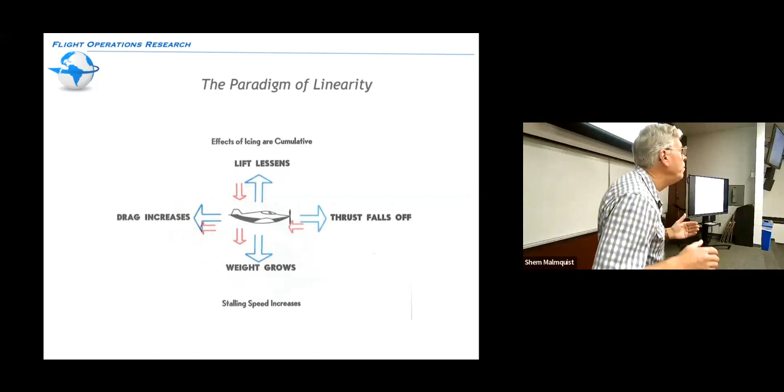Now, that brings us to a really, really key concept, important for everyone to understand: what I refer to as the paradigm of linear degradation.

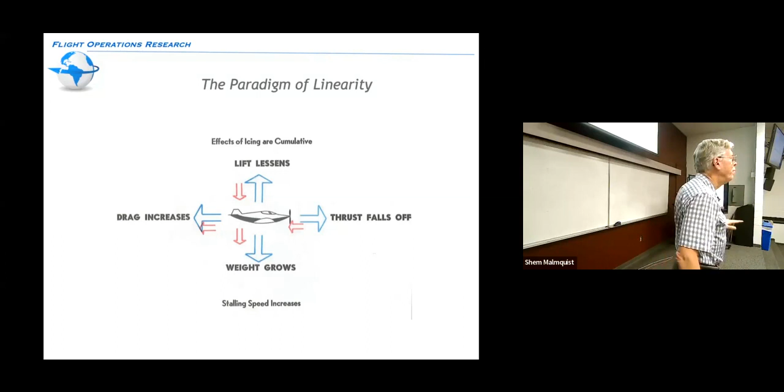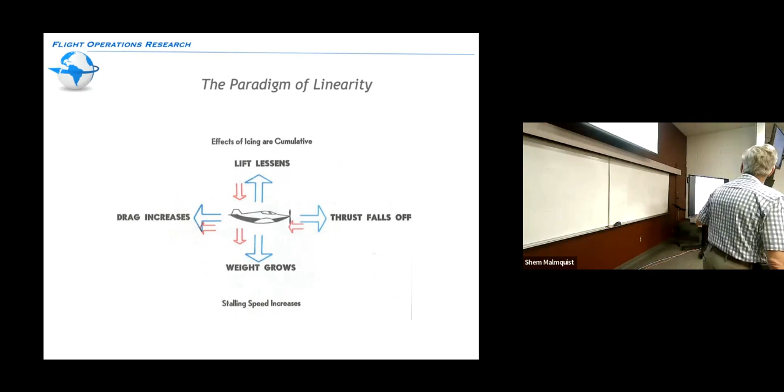So for many years, in the Aeronautical Information Manual, the FAA published this diagram. It's a classic four forces diagram, lift, drag, thrust, and weight. It talks about the idea that the effects of icing are cumulative, that drag is increasing, thrust is falling off, and lift lessens while weight... well, we need to think about that a little bit.

Does the weight really grow?

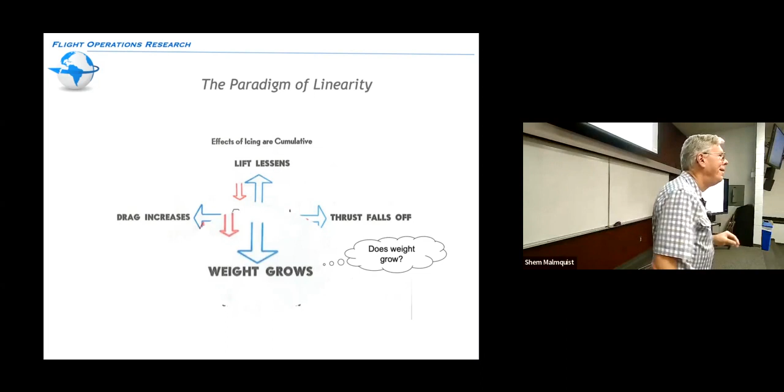Well, but by how much? Over time, the weight's the issue for the airplane. Not here, but if you're in an airship, that's different. If you work out the weight of the ice, the typical case, it'll never weigh more than the fuel you burn while you accumulate it. So in terms of it being a real issue...

So what is this all about? What are we trying to do? Well, if we look at this whole paradigm, what they're doing is building this kind of model.

That's not how it works. It's really, really important to get that idea out of it. And it's tough, because a lot of stuff needs to be kind of straightened out.

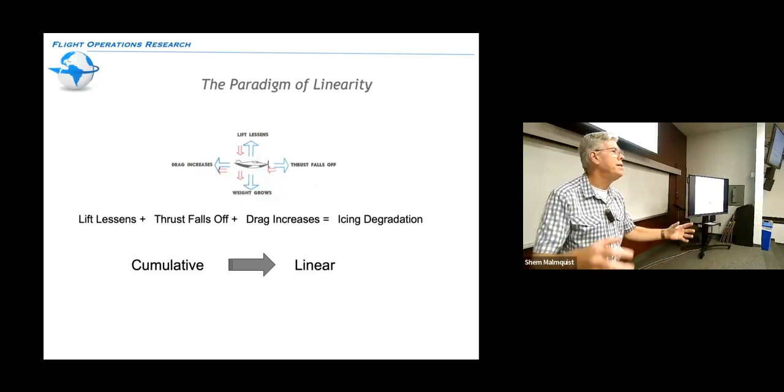Cumulative implies linear, though they don't necessarily mean it that way. They're sort of suggesting that all of these things can add up to your level of safety. And I get that idea, but the word very strongly suggests it's a linear problem. It is not a linear problem at all. And that's where we get into some real trouble.

And that's where it is. So, just to remind you, cumulative is leading down this linear path.

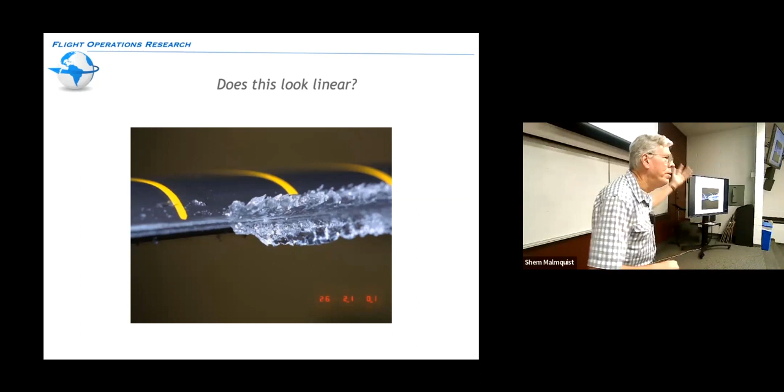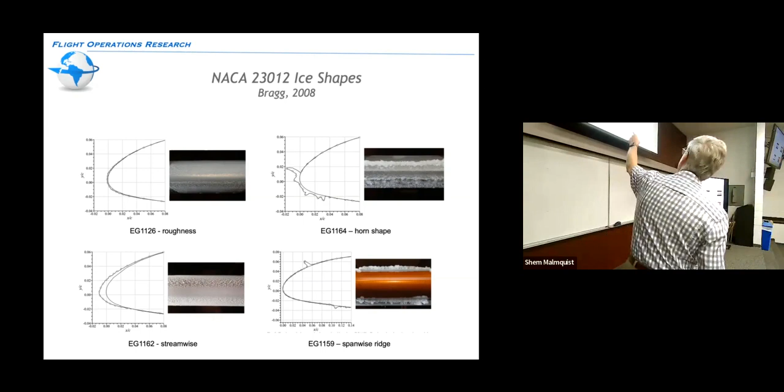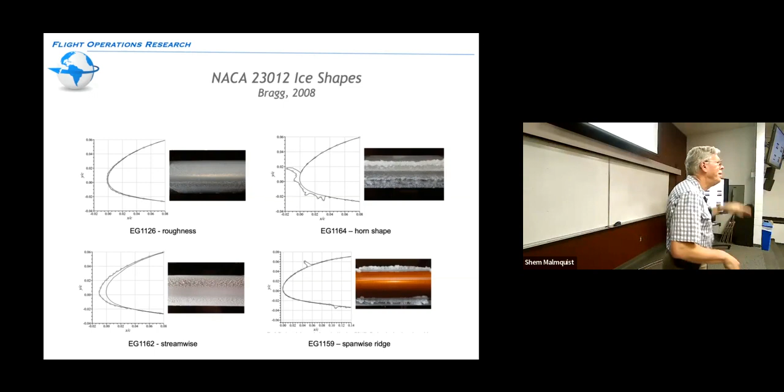Smooth stuff, yeah, it's a little bit misleading. So let's take a look at what the effects for these same ice shapes actually are.

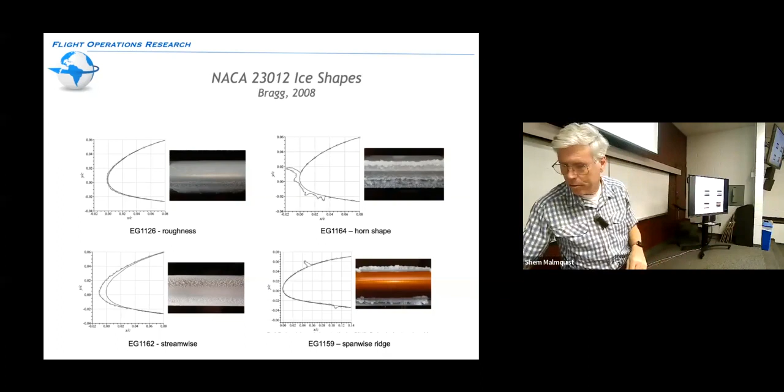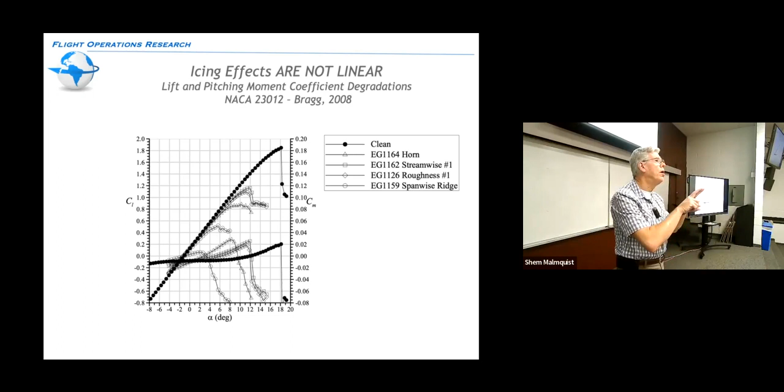The question is, are you going to realize that you are moving this? Notice all the spots kind of overlap each other. So the behavior of the wing is probably not going to be that critical or appear to be that different at that point.

Look in that area — are you going to notice any change there? Probably not, the plane seems to be doing okay. Increase the angle just a little bit more than in this picture. Cool.

So the idea you might get is that it's a linear progression and the icing effects get bigger and bigger, so you'd feel more and more of the degradation. But you're not going to feel it — it's going to be quite sudden, it's not going to be this sudden clear warning.

So that's point one: be careful of how the lift curve is affected. Be careful of assuming you're going to have a clear warning from the loss of lift — the loss of lift is probably not going to be obvious.

Next thing to look at is the pitching. If we look down here, the black line is flat, fairly flat — that's what we want, the pitching moment is steady. Notice all the ice shapes cause changes in the pitching line. Even much earlier in the stall, up here, we're starting to see departures in the pitching line, which can be fairly significant.

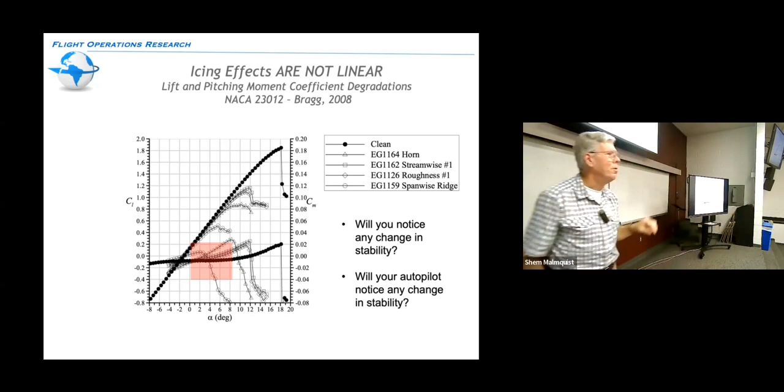Does that make sense to everybody? Keep that in the back of your mind. Now let's take a look at the drag.

You're going to see significant degradation early. Most people with experience in the left seat aren't having any problem with drag recognition, but the drag problem may be sufficient that they're out of power, not having enough excess power to maintain the speed. So one of two things is going to happen: we're slowing down, or going down.

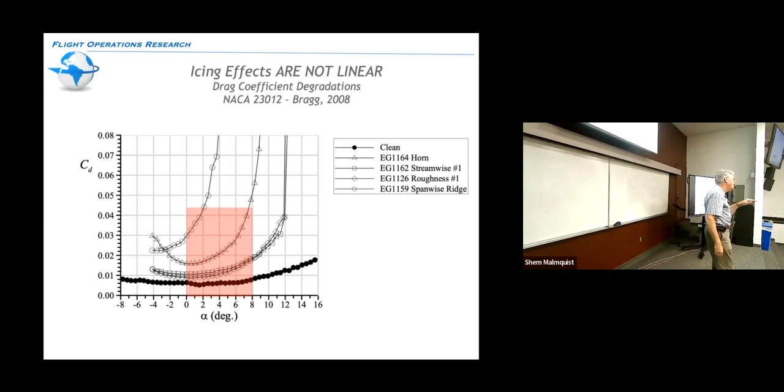Typically in light aircraft, general aviation aircraft, particularly people with slightly high performance airplanes operating near their service ceiling because they're trying to cross mountains, they get into real trouble. They can't make it out. So what happens? They descend, or they try not to descend, and then the airspeed goes, and we get back to the previous slide of stall and loss of control.

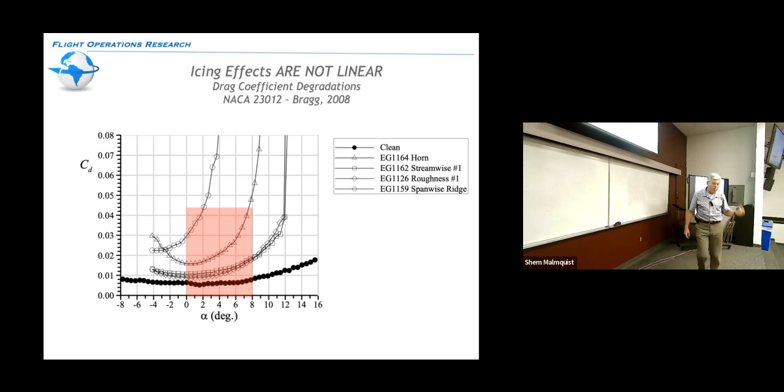So the drag is probably going to show up earlier than the other effects. Once you start getting into the drag problem, you can look at this slide and say to yourself, I'm feeling this kind of drag, I'm really getting a lot of drag. Just go back to the previous picture in your mind. It's probably pretty close. We need to manage this. We'll talk about that at the end, just how we're going to manage this.

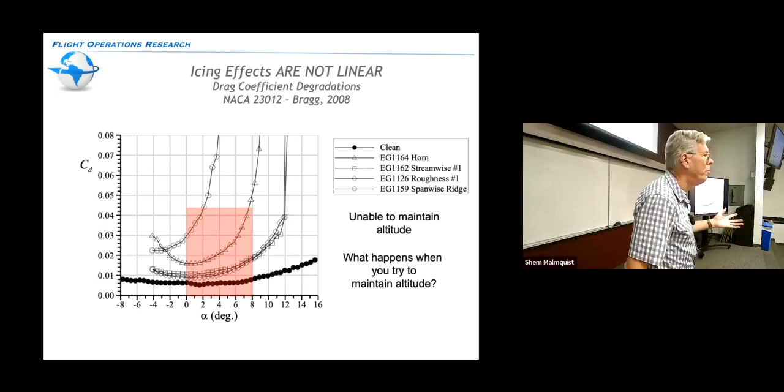Okay, let's talk about another piece. It's a little bit of a shock. What is known as the roughness factor, usually the k over c. Basically this is the height, thickness of the ice, ratio to the chord length.

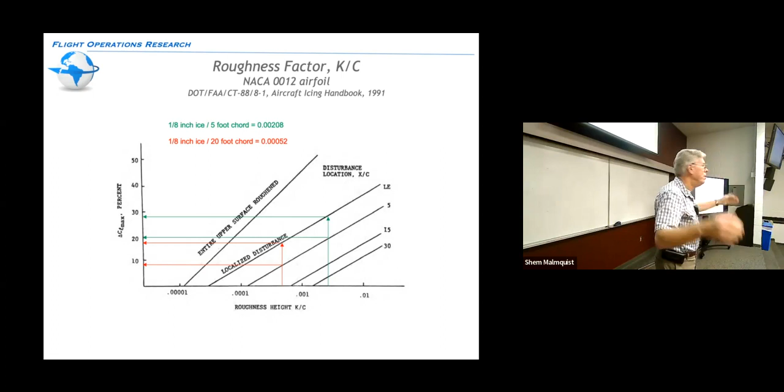So what you can see here is, look at the red arrow - we're looking at an eighth of an inch of ice on a 20-foot chord. Green arrow, eighth of an inch ice on a 5-foot chord. So with the 5-foot chord, we look at the ratio and it gives us the roughness. Here we come up, we put the ice on the leading edge, we get a 28% degradation in the coefficient of lift. If we put it 5% forward, halfway back on the ice piece, we have 5% of the leading chord, 5% back, you're going to get a 22% degradation or so.

Now this is representative of one airfoil, not the same for all. The idea is you can see the kind of degradation you get depending on where we put the ice shape and the thickness. You take the same ice shape, put it in the same place on a 20-foot chord, and you can see the degradations are much lower.

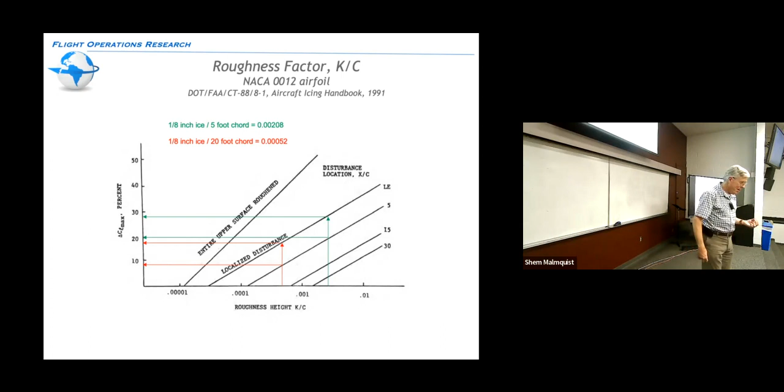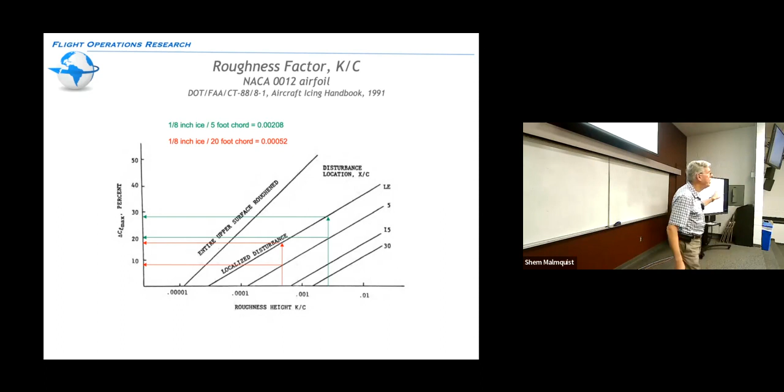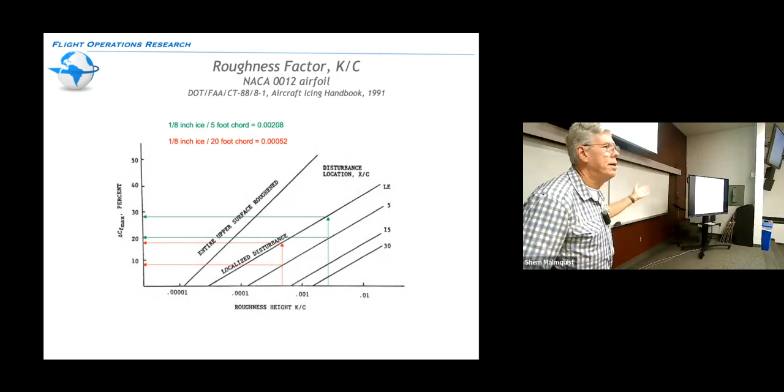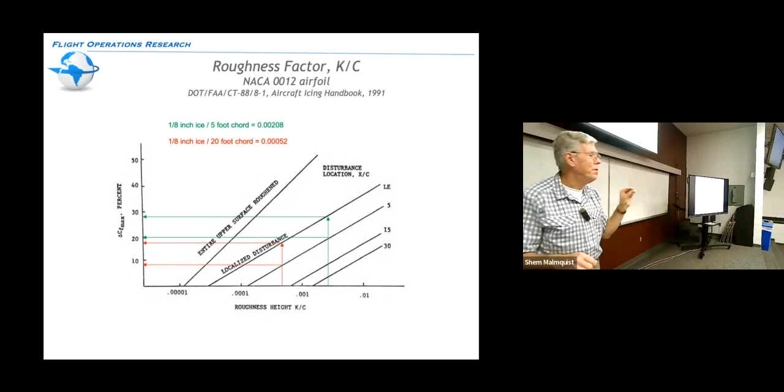Does that idea make sense? You can get the idea of the ratio between thickness and chord. You're on a 747, you put on an eighth-inch of ice, you probably won't notice. You put that same ice on your small plane, you'll notice it much more - so it's not just the thickness of ice, it's the relationship with the chord. So what does that lead to?

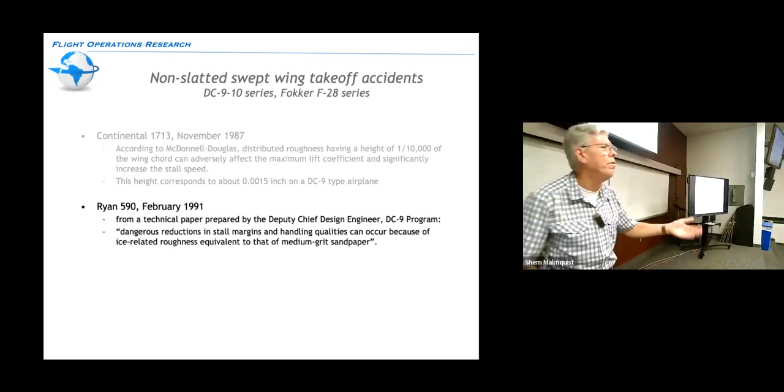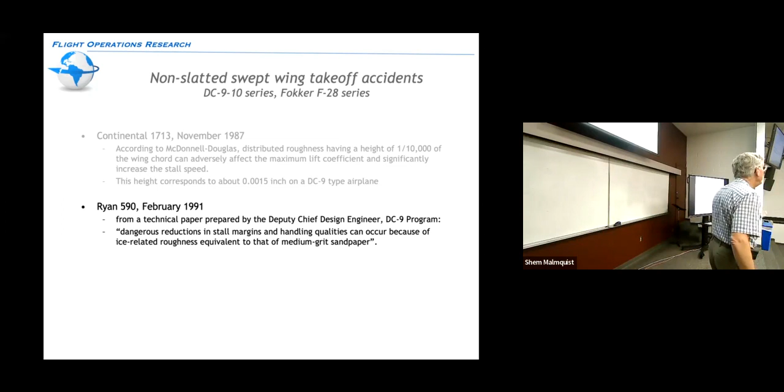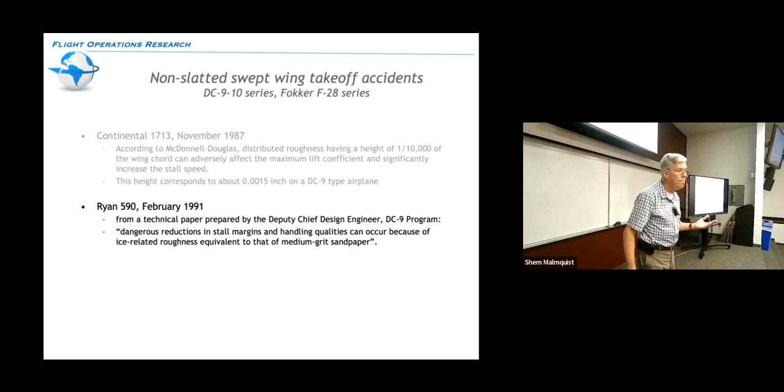On the other hand, in flight, be a little bit careful when people tell you that big airplanes don't have icing costs. Because the ASRS report - that's the database - shows a 757 approaching Chicago.

What the crew said was at 200 feet, the airplane pitched forward severely. Go-around throttle applied, 50-foot call occurred in the middle of the approach lights, maximum throttle applied, and just barely cleared. Then they said on arrival at the gate, we found the entire aircraft was covered with clear ice, 1 to 2 inches. So most of the time we don't have a problem.

I've never had a problem with this. Don't get too complacent just because you're in a big airplane.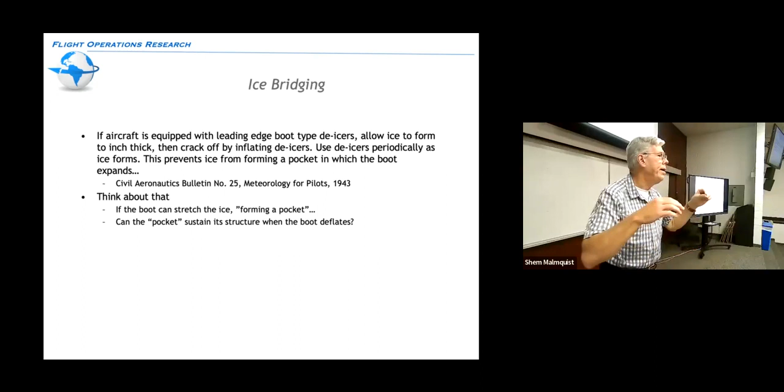The other possibility is that what we're seeing is residual ice left over. The important thing to understand here is how many cycles of the boots it takes to clear the ice - not just one. That's the problem.

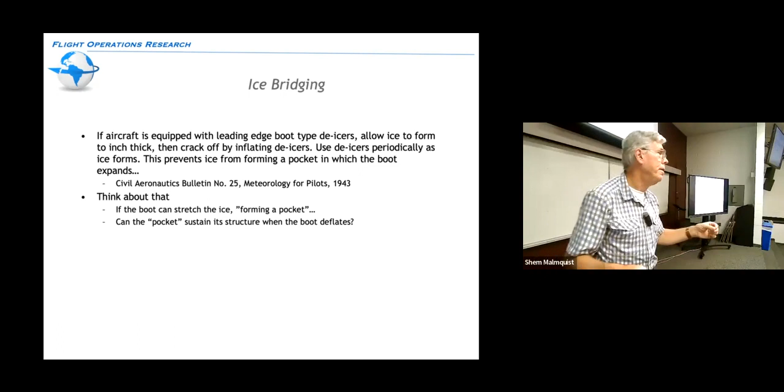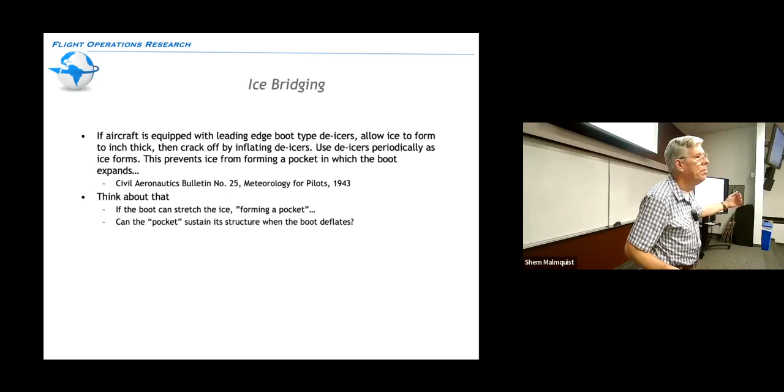People will cycle the boots and say, I got a little bit of boot cycling, look out and say, oh, I need to de-ice. So the feeling is it must not be working. Well, it turns out it takes a little more than just that.

I do want to point out that in the icing database, looking back to 1980, there are literally zero accidents.

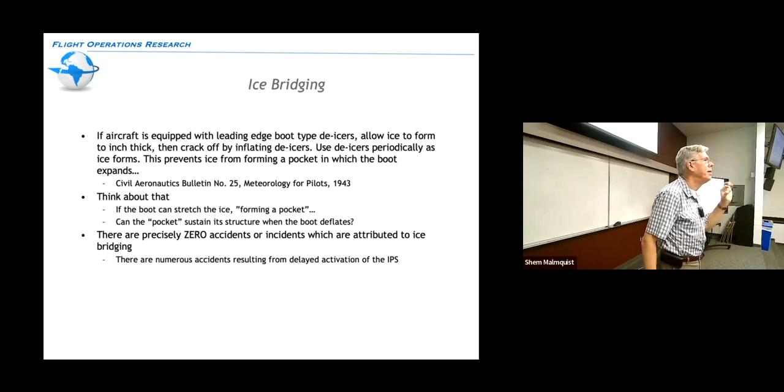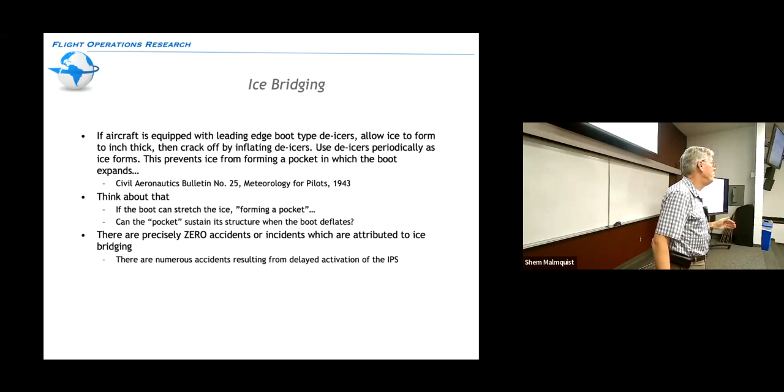There are, however, plenty of accidents resulting in the delay of activation. People say, I didn't want to put it through. I was afraid of it. We didn't charge it. I don't think it's...

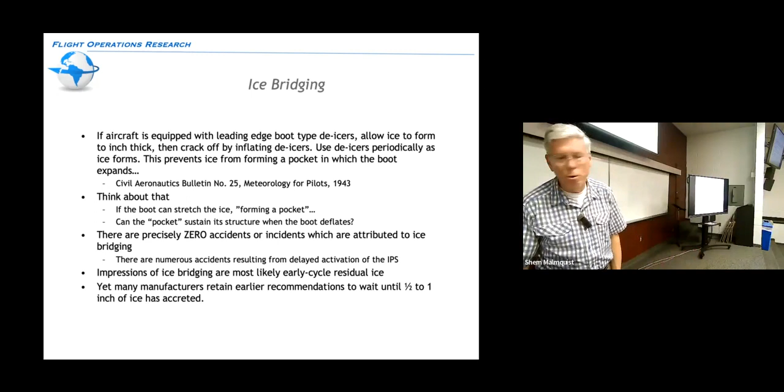As I said, most likely the early cycle residual ice. Let me just explain what that means. I should point out that manufacturers still recommend to wait until half to one inch.

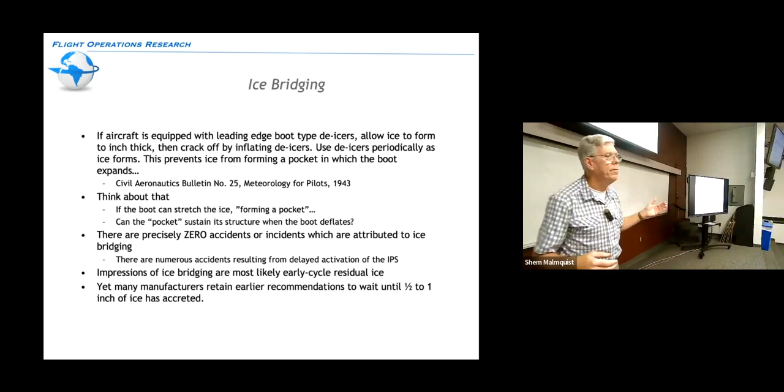There are a lot of reasons for that. That's where you get certificated. They don't want to change that because they haven't done the new certification work on it, et cetera. So comply with the manufacturer's recommendations. In some cases the grade quality is different, be aware of this component. Now, it turns out the guy did a whole bunch of these back in '56.

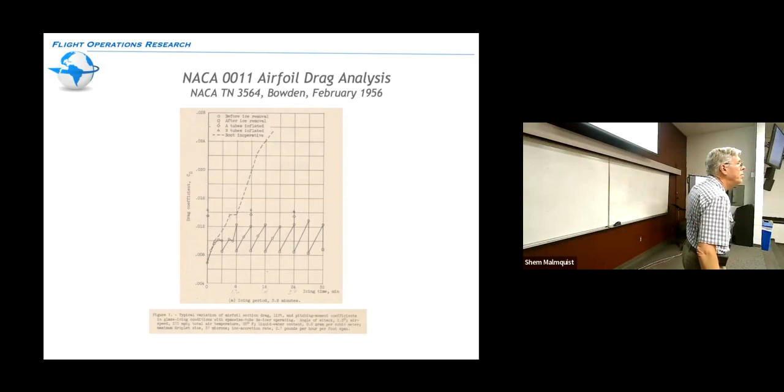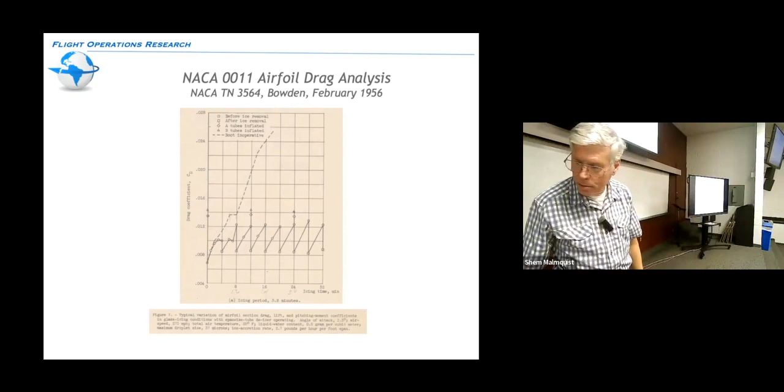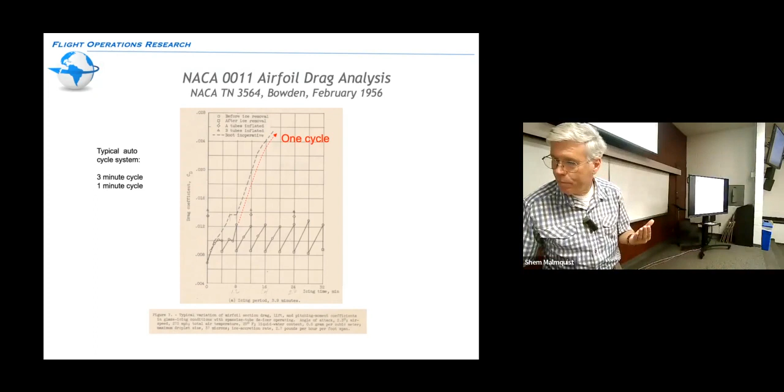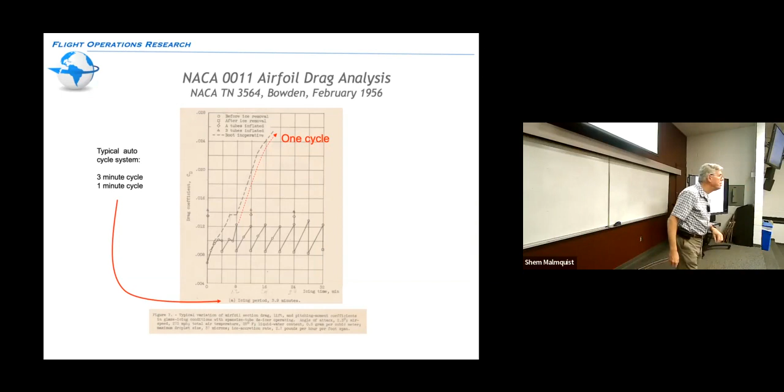Now, on the other hand, if you look at an automatic system, like most of your large props and so forth, you're going to have a timer, typically three minutes, sometimes as fast as one minute. You can set that timer and just run it. Notice the icing period used here is 3.9 minutes -- look at the sawtooth pattern down here. That's what he's getting by cycling the boots every 3.9 minutes.

Okay, let me tell you a little story. Back in the '80s, we had an auto-cycle system, and we all knew it was pretty good stuff, so we went with that. We were always watching the windows and pointing out ice breaking off.

One night, I don't remember where I was coming from, west of Richmond, and really getting this weather, and we were busy as hell. I just did not have time. I said, all right, screw it, we got distracted by all the other stuff going on. Ten, twelve minutes later, I thought, geez, looked out, cleaned this off -- ooh, it's working beautiful, you know. And that's what we really got to do.

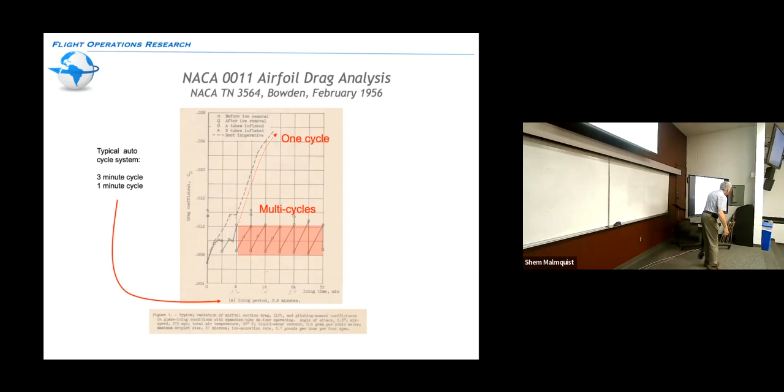But the point is, the first couple cycles are not quite as routine, because it takes two or three or four cycles to actually get cleaned off and develop a consistent pattern of what we call intercycle, which is what builds into cycle, and residual -- what's left after. We want to do these cycles properly, we've always been stuck on this, and we want a consistent pattern. That's what the boot is designed to do.

One other thing I'll add is most pneumatic boots are a material that has to be maintained. If you don't take care of your boots, they're not going to perform. They have to be lubricated or have talc or those other compounds that are used. You have to maintain the boots -- whatever you want here, and if you do it, you really stop the problem. So to get this good cyclic pattern of the boots, you need maintenance.

Okay, so by the way, I noticed this particular research is 2.7 pounds per hour per foot span, just to give you a sense.

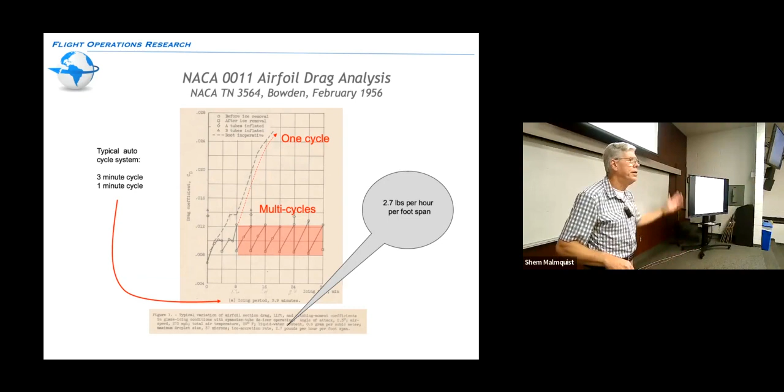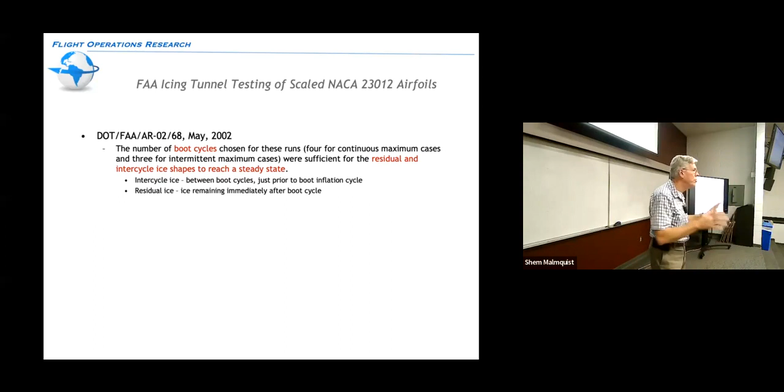If you want to, go ahead and cycle the boots, run through the cycle -- don't necessarily worry about checking to see if it's working right away. Just keep cycling the boots going.

They did a bunch of other testing. They mentioned that the boots were just as effective when activated 11 seconds from the start as they were if you waited longer. So that's another feature -- just getting started, don't worry about waiting. Which again goes back to complying with the manufacturer's recommendations.

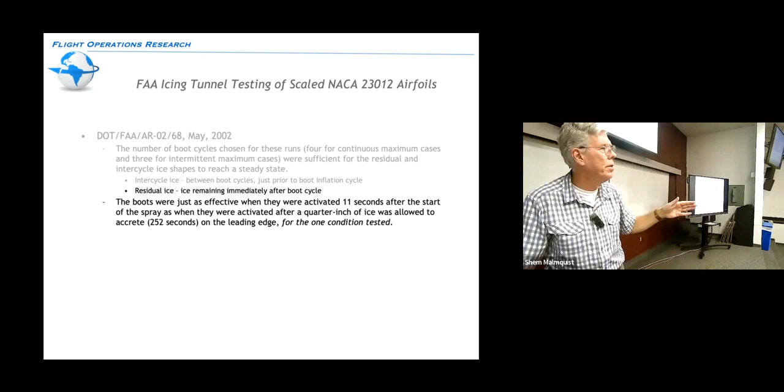That's kind of what the rest of it showed. In '06 they did the same thing, and they had pretty much the same results. So the key point is just the multi-cycle.

Let me show you the effect on the ice accident data. If you don't operate the de-ice, you get that result, because if you don't use it, you don't have protection — you can't trade that. If you operate the ice protection at less than four cycles, you still get slight icing.

I was able to figure this out by reading lots of pilot reports and statements. These are the things we do, but all the data doesn't tell us exactly how we do it. So basically what it comes down to is at less than four cycles, you still have lots of problems. At unknown cycles it's a little less — we really don't know how many cycles. Guys who operated manually more than four times had better performance than we do now, and that's really all I'm trying to get at.

When we have the auto-operated product, you have to do this at a smaller size. The point is, multiple operations won't get rid of the other issue, and eventually we get to a steady state. That doesn't mean don't pay attention to it — it's not that it's not working, but just because cycling over time doesn't mean it may not be working. Check it, but it's a multi-cycle issue for us.

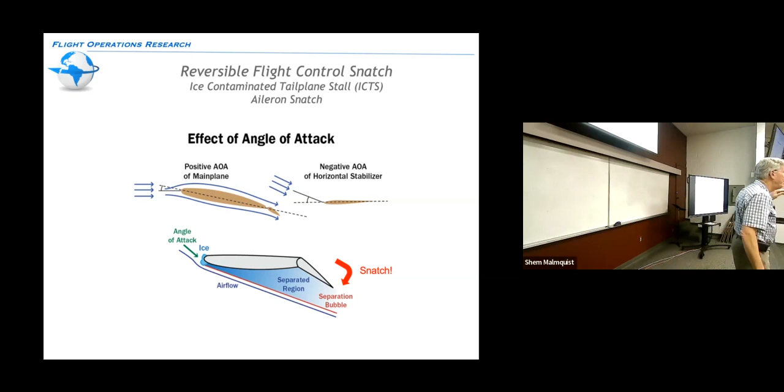So the control literally snaps and moves to full deflection without any input from you. It still works — we get the airflow lower effect with the pushing effect, but you don't have control. That's what happened over Roselawn, coming out of the holding pattern — it was pretty slight, and the close separation over the top of the aileron disrupted the others.

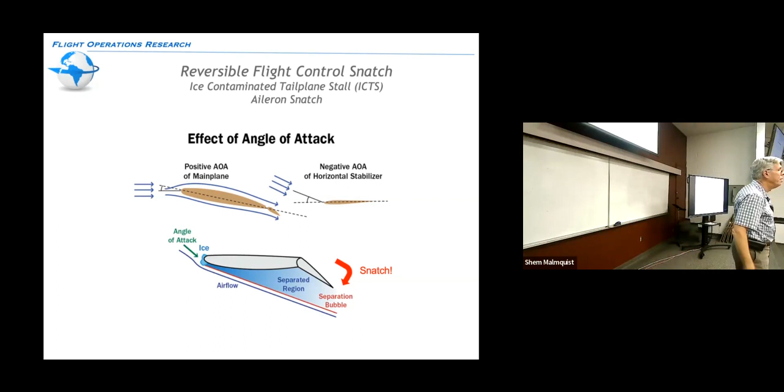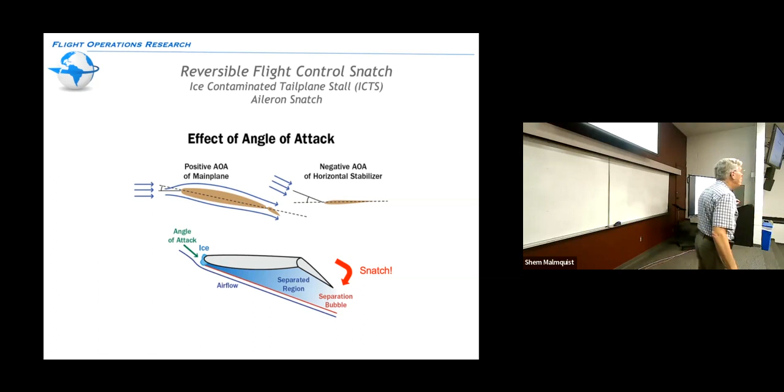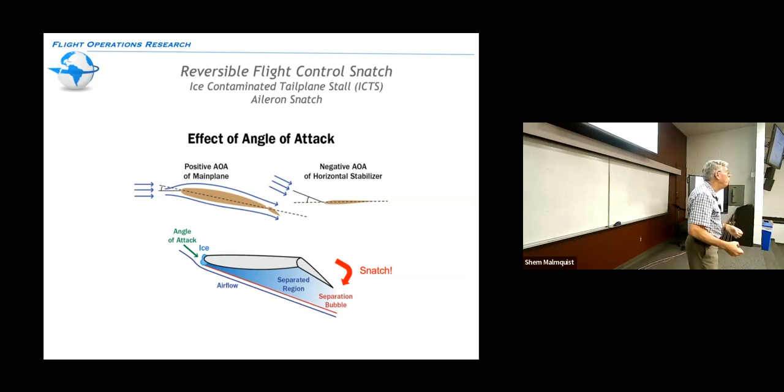A couple other things can happen before that. One of the things that can happen is you can have a change in the stick force gradient. This is a really nasty feature that might be associated with the tailplane stuff.

Just to give you a general sense of what's going on here — we want it to be stable. We want the stick force gradient to increase as you pull or push the stick; we want more force with more pull and push. What happens if that gradient doesn't change? You pull the nose back and it feels the same as it did when it started — there's no stick force change at all. How does that affect your workload and your stability? I think you can get an intuitive sense of it.

Here's the thought — what happens in typical ICTS events: you're on approach, coming down a 3-degree glide path, you get a little high, you push the nose down, the elevator goes down, that enhances the flow separation. You get below the glide slope because you got much more deflection than expected, so you pull back, but the stick gradient has changed. You get low on glide slope, so they pull the nose back up, and now they get lots of deflection, much more than they expected. They go way above the glide slope, and thinking 'oh my God, we're in trouble,' they shove the yoke forward — and that's all it takes.

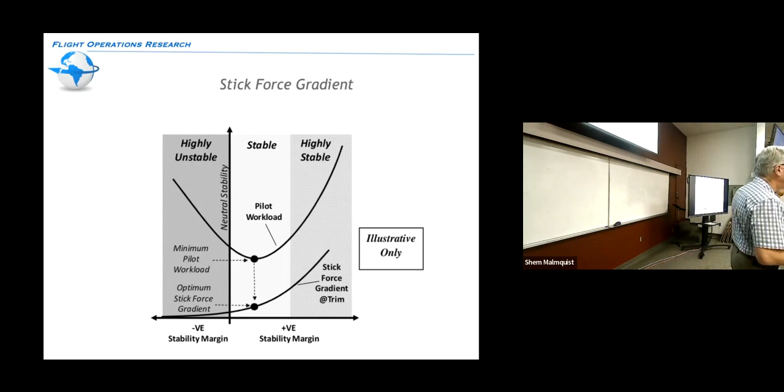It's a little bit unnerving to think about. So anyway, stick force gradient.

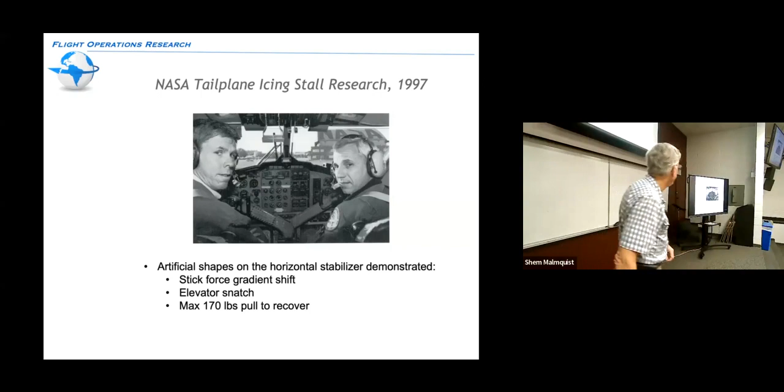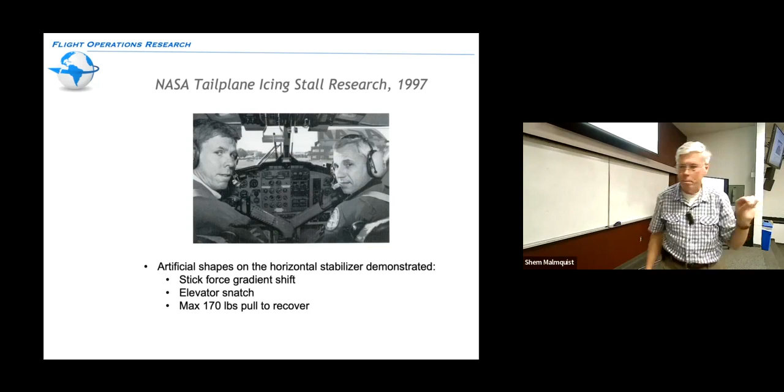Last one I want to go through is drag. This is a big one. You're going to run into this before you expect it, and nobody talks about it. It's amazing. So back to Dean Bowden's work with the drag curve.

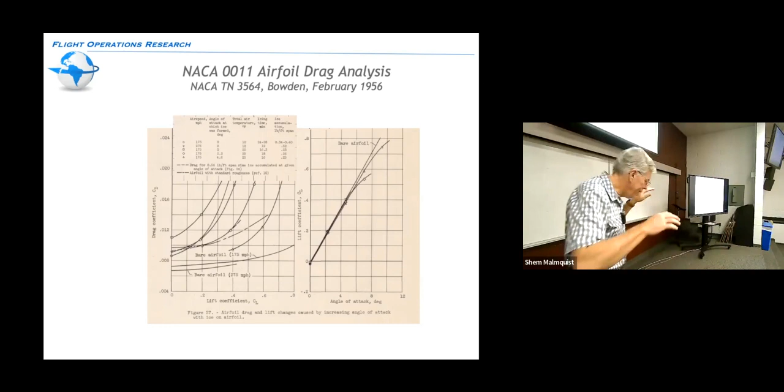What he's going to do is say, alright, let's start at a 2.3 degree angle of attack, because that's what spring ice gives. If we look over here at the 2.3 degree angle of attack, we'll often get a lift coefficient of about 0.2.

Now we use that 0.2 and go over to this drag curve. We've got a bunch of curves, and I'll try to walk you through this to see what's going on. It's kind of cool, particularly since he was doing this in 1956, nobody thought it made sense. You come right up here, you get a bare airfoil coefficient of drag of about 0.0075. We're going to see that in the spreadsheet.

That's the bare airfoil. Now, let's take the iced airfoil at 2.3 degree angle of attack. Come up the same way, move it up, and we get a drag coefficient of about 0.01. So there's a delta, a change. You get more drag with the ice at 2.3 degrees angle of attack. The boxes indicate the change in drag from clean to ice.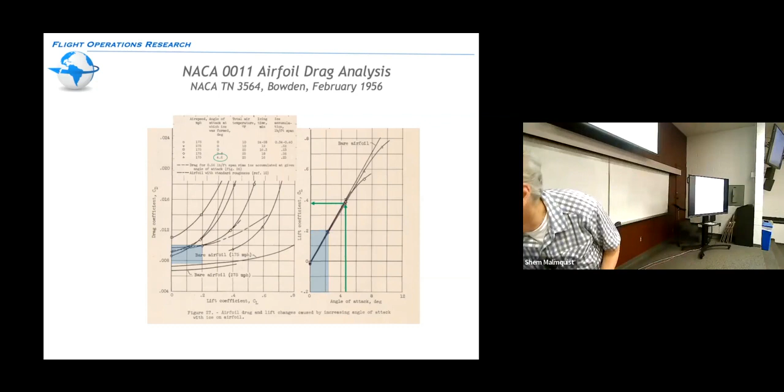Now we'll look at the ice if we accrete it at 4.6 degrees, double the angle of attack. Now we have a different lift coefficient, the green arrow, at about 0.38, and we enter at the bottom at 0.38, go up to the clean airfoil. Right there we get a drag coefficient on the clean airfoil of 0.008. So we accrete at this higher angle of attack, and we're going to get a drag coefficient.

Now we'll move up to the iced airfoil at 4.6 degrees, and we get a drag coefficient of 0.0092. So you can see there's actually less of a change at 4.6 degrees than there was at 2.3 degrees. Okay, that's cool, I think everybody wants this. Here's the cool part.

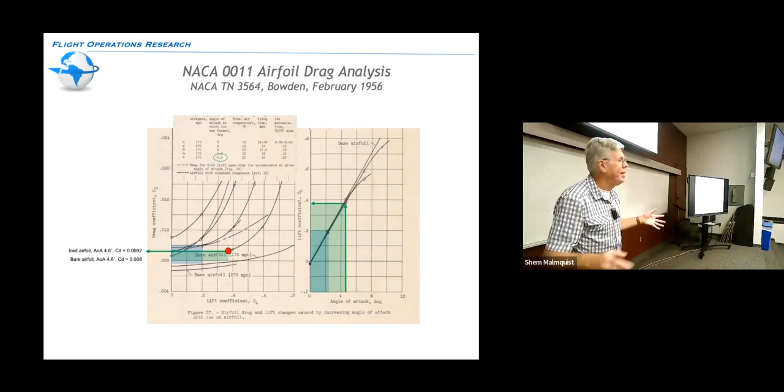Let's go back to 2.3 degrees. So here we are, angle of attack 2.3 degrees, just to do the question of what we just did. We come up here, that's our bare airfoil drag. There's the iced drag from accreting the ice at 2.3 degrees. Now let's increase the angle of attack to 4.6, with that ice we picked up at 2.3 degrees. Follow the red ball up the curve and across there, and we get a drag coefficient that's much worse than we would have if we'd accreted it at 4.6. Does that kind of make sense to everybody?

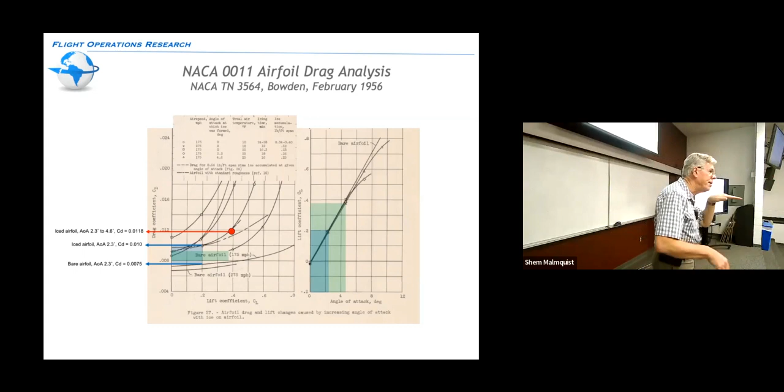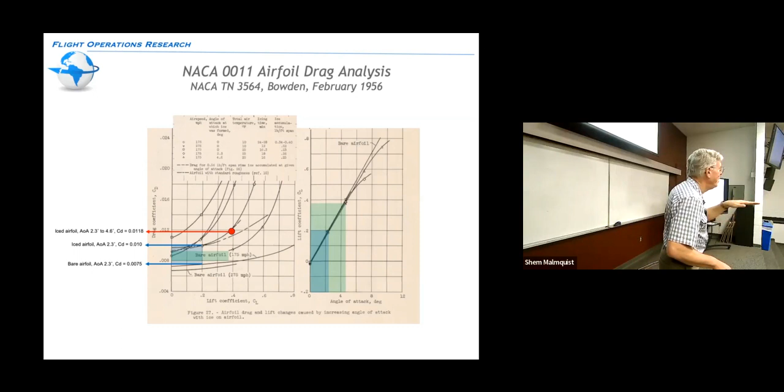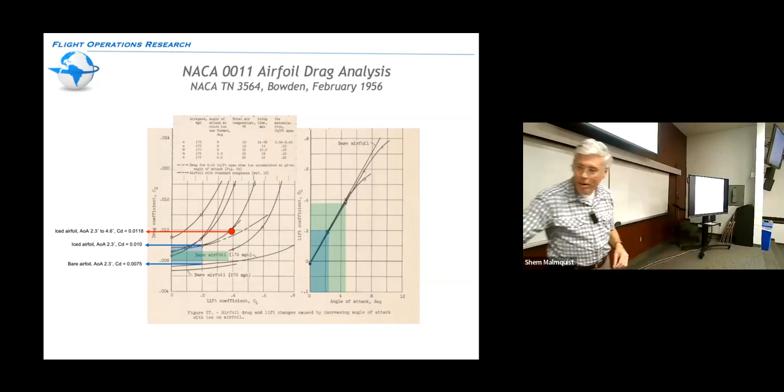Rather than a single angle of attack, we're picking up the ice at a lower angle of attack, and then we're pitching up and increasing the angle. What's that? That's flare, that's what you're doing when you flare the airplane. So you came down the road and you picked up the ice, and then you flare. What happened to your drag? It went right through the roof, much different than the other drag.

I know the plots were a little bit hard to follow, but what is really interesting to me is that in any of the official publications about it, nobody talks about this. And I don't know why - it's such a huge contributor to that.

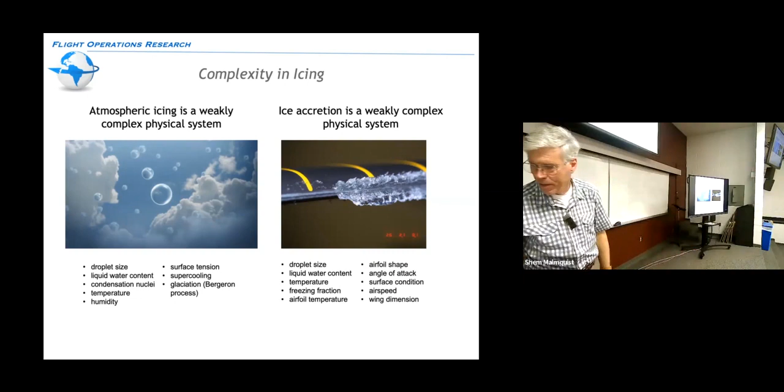Predictable in principle, but not in practice - we kind of just understand. Where does this lead to? How do we ensure safety in a non-linear context? It kind of wraps this whole thing up, this whole model of thinking, which I'm going to advertise as a book - I have a regular template for looking at this. How do we do this? Step one: check the margins.

That means anti-ice, de-ice, controlling angle of attack, not pushing the edge, not going all the way up to the cliff. It's building margin there. Protect margins as if they are solid limits. They never cross the margin. The margin is there for the things you can't anticipate. Don't willfully say, I'm just going to use a little bit of margin. You always use margin, protect the margin, always protect the margin.